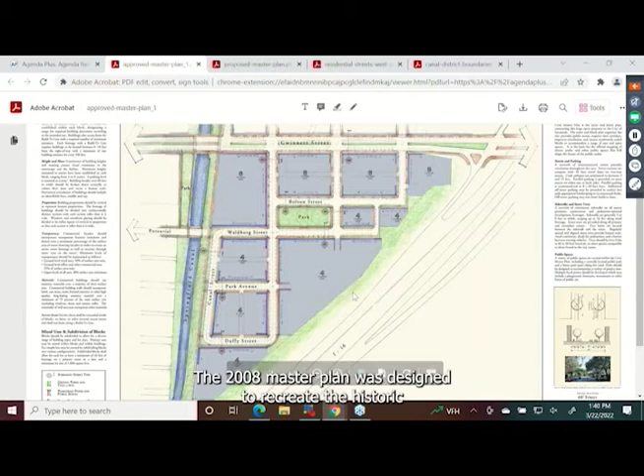There was a master plan approved in 2008, and this is a copy of that plan. The 2008 master plan was designed to recreate the historic development pattern and the open space network of the downtown historic district. This property, on the south side of Gwinnett Street, is right across the street from what is now the Enmarket Arena site, the City of Savannah's new arena.

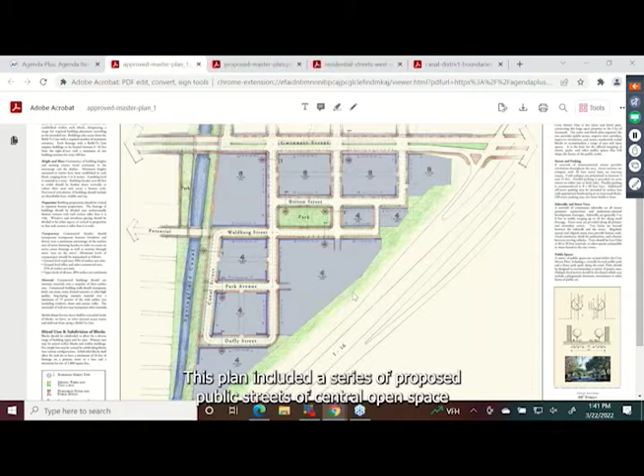This plan included a series of proposed public streets, central open space, and planned intersecting vehicular connections across Gwinnett located here. There were 4 access points proposed across Gwinnett Street into the arena site, and a potential access across the canal to Stiles Avenue to the west, located right here.

These connections today will not be possible based on the design of the Gwinnett Street improvements, which are currently under construction and slated to be completed this summer. But at the time this plan was developed, the final design of the Gwinnett Street improvements were unknown, and therefore some assumptions had to be made about connectivity.

I'll show you in the next plan the proposed connections for the site as the current applicant is requesting. In addition to this plan, there were development guidelines associated with it that include height and mass for buildings. It recommended buildings between 4 stories and 8 stories in height. Each of the areas in blue here are the developable areas.

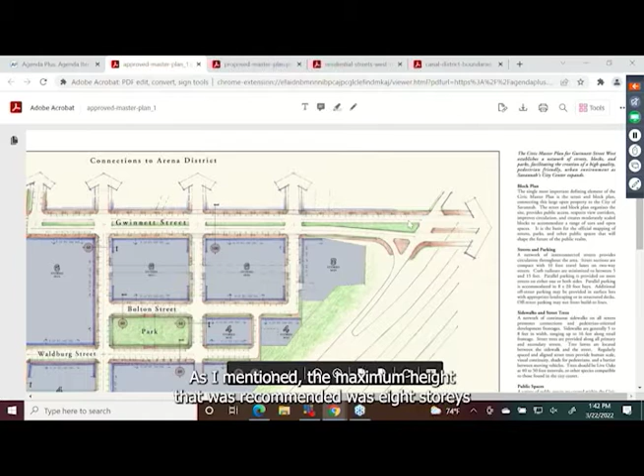As I zoom in a little, you can see the proposed build-to lines that were recommended for the various blocks to be street fronting buildings in those areas. The maximum height recommended was 8 stories, and all the heights on this project were proposed to be defined by stories, not by feet.

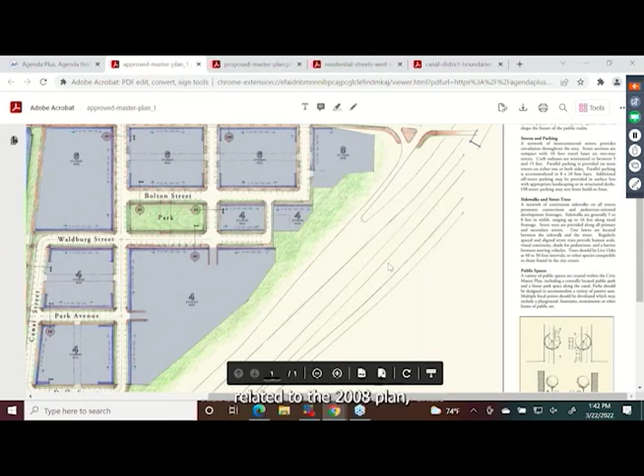The principal concern that came out later related to the 2008 plan, which we're looking at here, were stormwater issues that came to awareness later in the process. As you can see, and as I noted, this property is still undeveloped. This is the subject property located here, and outside of a cell tower located on the property, it's completely vacant.

The city is aware of a stormwater issue in this area. The Springfield Canal runs along the west side of the property here. There is a proposal for improvements in this canal to address these stormwater issues, but until that is done, any development of the subject property will need to address some of the stormwater concerns. This property is immediately east of a few streets that I want to point out here for later discussion.

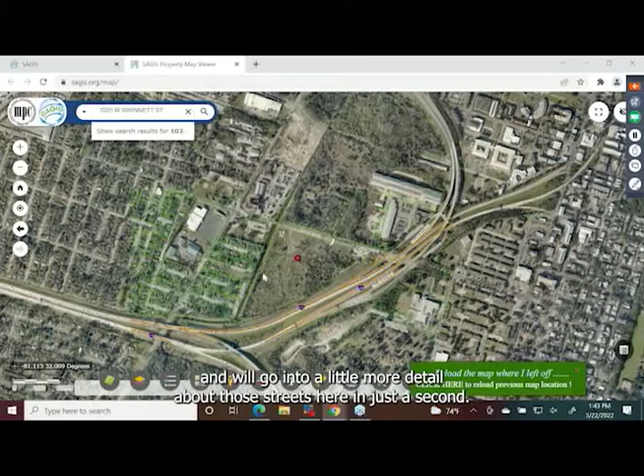Springfield Street, Felder Street, Darwin Street, and Hearn Street. This is a residential area adjacent to the subject property, and we'll go into a little more detail about those streets here in just a second.

The site you see here in the northeast corner is a proposed multifamily development. They would, however, with this master plan, leave the remainder of the property undeveloped, and that would serve as stormwater detention, both for this site and the greater area in general.

I did want to show you also that on this plan, the applicant is proposing additional right-of-way for the city for the widening of the canal. The belief is that once those improvements take place, then this property becomes developable based on those improvements.

But the interim development would require that this area be maintained for the purpose of controlling stormwater. The 2-phase approach of the current plan is to develop approximately 50% in that section, and for that remainder, as I mentioned, to remain open.

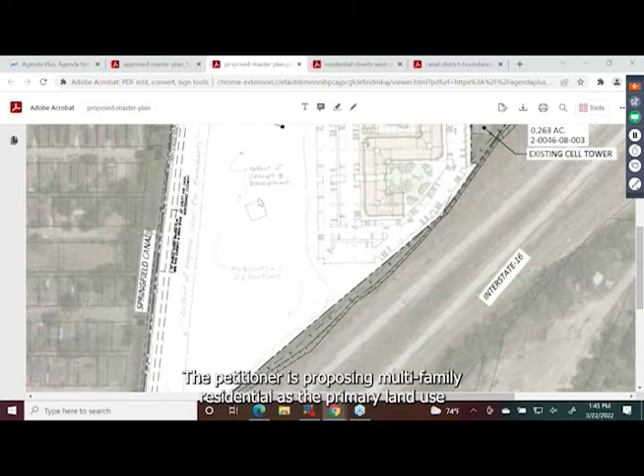The petitioner is proposing multifamily residential as the primary land use. The northernmost building will be developed to potentially accommodate a non-residential use as well. There are internal amenities and outdoor space provided with this development, and phase 2 is proposed to be future development available upon completion of that canal.

That future development would require that if this master plan is approved, it be brought back to the Planning Commission as an amended master plan at that time.

The subject site, as I mentioned, has frontage on Gwinnett Street. West Gwinnett is in the process, as I mentioned, of being improved, and it will include a 4-lane divided east-west travelway, new sidewalks and bike lanes, and a bridge over the Springfield Canal.

Portions of the subject property were dedicated to accommodate the new right-of-way and the pedestrian mobility features. The city plans for the West Gwinnett improvements to be substantially complete in the summer of 2022, and public transportation will be available along Gwinnett Street.

Per section 5.1010 of the zoning ordinance, the applicant will be required to provide a bus shelter with approval of the Chatham Area Transit when a development plan is submitted.

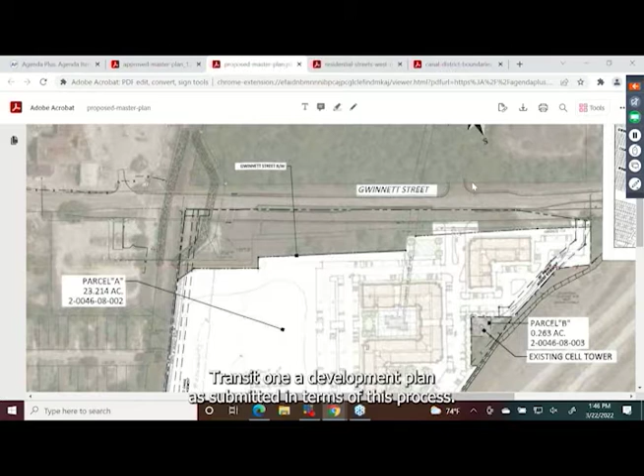In terms of this process, if this amended development plan is approved, at the time the applicant is prepared to construct something, they will have to submit a general development plan, a specific development plan to the city of Savannah for review prior to construction.

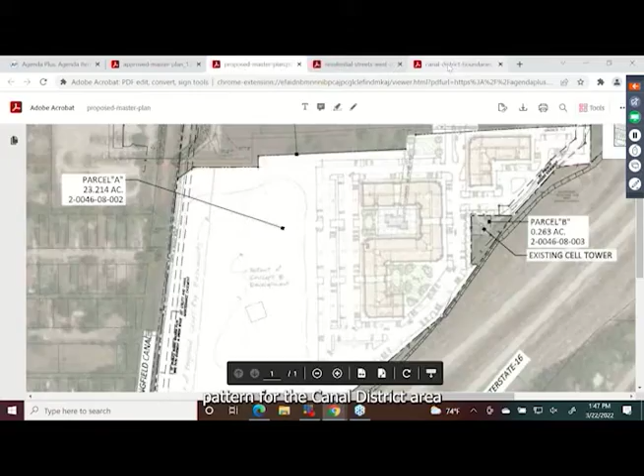The proposed land use change is consistent with the planned development pattern for the Canal District area. These are the boundaries of the Canal District as identified by the city of Savannah. The subject property is highlighted here.

The Canal District is proposed to be a mixed-use area designed to support the area around the Arena, which is located roughly in this location, with residential density, commercial and hospitality uses as well.

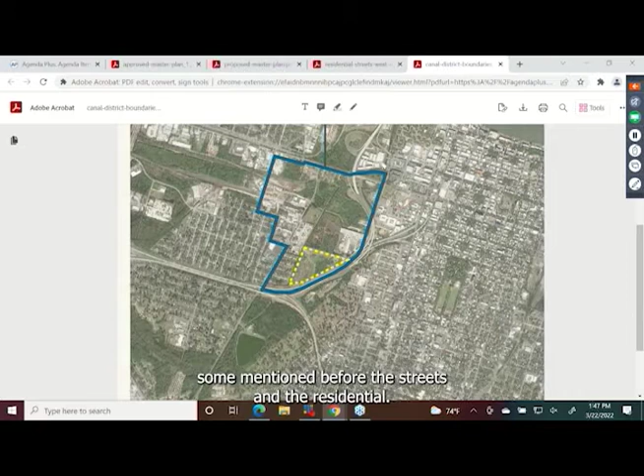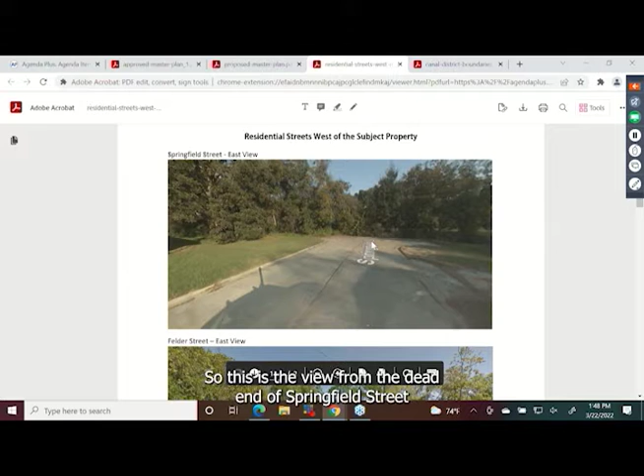I wanted to go back to show you a few photographs, as I mentioned before, of the streets and the residential that's immediately west of the subject property. This is Springfield Street, the view toward -- and all these streets dead end at the canal. That's the point I wanted to make. So this is the view from the dead end of Springfield Street across the canal toward the subject property.

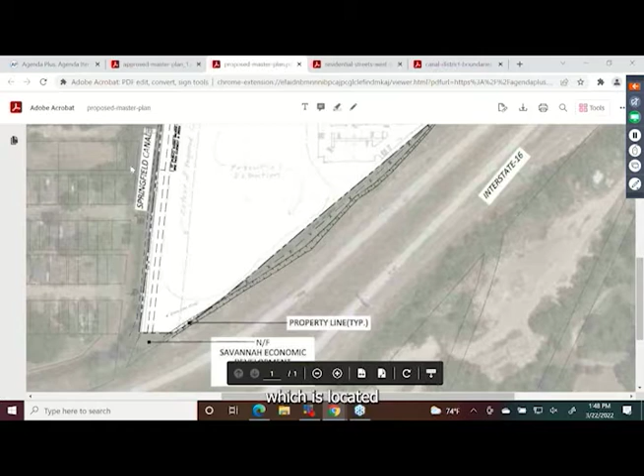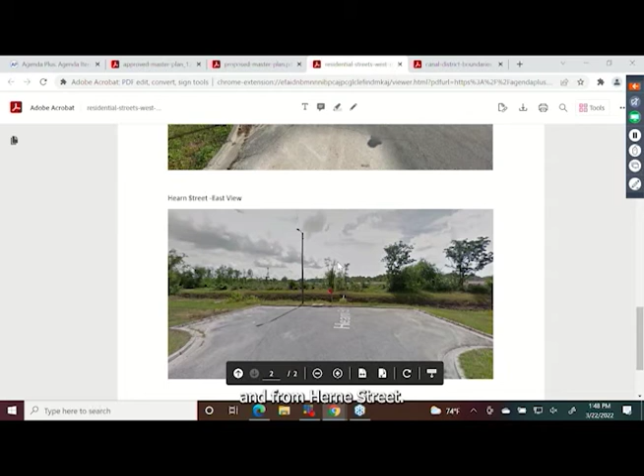This is the view from Felder Street, which is located approximately here. This is the view from Darwin Street and from Hearn Street. All these are looking east toward the subject property. And you can see, I believe in this view, the cell tower in the distance there.

We believe that the location of the subject property is conducive to supporting residential density. It does not immediately abut another use and will be accessed from a new 4-lane roadway. Phase 1 development is approximately 600 feet away from the nearest residential dwelling to the west across the Springfield Canal.

Planning efforts in the vicinity of the subject property have prioritized densification, pedestrian connectivity, and a mix of uses. The proposed amendment appears to align with these goals and the larger goals of the Canal District, and we believe that the master plan could potentially catalyze additional development in the area.

The opening of the arena and the further development of the Canal District master plan have provided a foundation for future development, and it's clear from staff's opinion that, based on the stormwater improvements needed in the vicinity, the existing plan is less feasible than the proposed plan.

So based on all those findings, we're recommending approval of the amended master plan. We are recommending a series of conditions, and I'll bring those up for you.

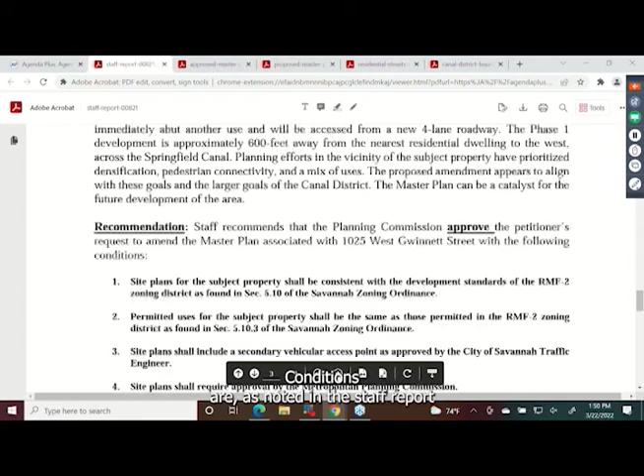Conditions are, as noted in the staff report, staff is recommending approval with conditions that the site plan for the subject property be consistent with the development standards of the RMF2 zoning district, that the permitted uses for the subject property be the same as those permitted in the RMF2 zoning district, that the site plan shall include a secondary vehicular access point as approved by the City of Savannah traffic engineer, and that any site plan for the property be approved by the Metropolitan Planning Commission.

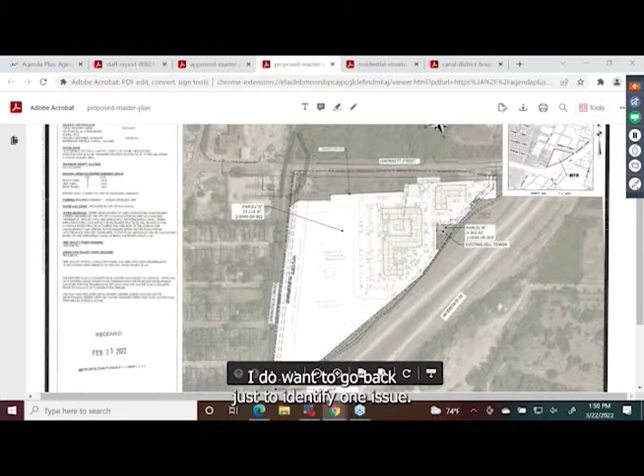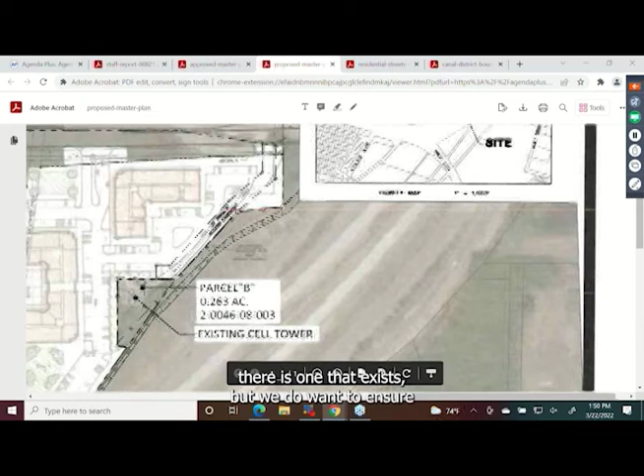I do want to go back and identify one issue. We've mentioned the secondary access. There is an existing access point to the property that's used as a maintenance road to the cell tower, which is located here. Our intention in recommending a secondary access—there is one that exists—but we do want to ensure through the review process that the City of Savannah is satisfied with that access point as an emergency access for the multifamily portion of this development in terms of the surface materials that are there.

But with that, I'll open it up to any questions. The petitioner's representative is here, as well as the engineer on the project, who can answer any technical questions.

I'm going to ask the petitioner to come forward. Yes, sir, and we'll ask you both questions if need be. Good afternoon, Mr. Yellen. Good afternoon, Mr. Chairman. For the record, Josh Yellen, on behalf of the developer, Spandrel Development.

We have with us both the developer and the project engineer, as Mr. Lotson mentioned, and they are also here to answer any and all questions that y'all have. We did want to thank staff for their recommendation of approval for this master plan amendment.

We think this master plan amendment has been a long time coming. This site was rezoned with the approved master plan that you saw in 2008. Prior to that, it was zoned business commercial for big box retail. Prior to that, it was approved for, I believe, 4 or 5 SCAD dormitories with a SCAD health facility. Obviously, as you can see, 15, 20 years later, this property remains vacant and undeveloped, in part because of some serious site conditions and, for lack of a better word, serious warts that this property has. There's a stormwater issue, there's a Springfield Canal issue, and there's also some environmental issues plaguing the site.

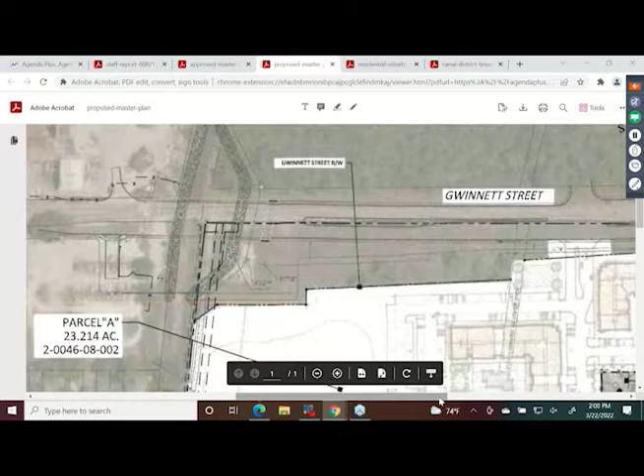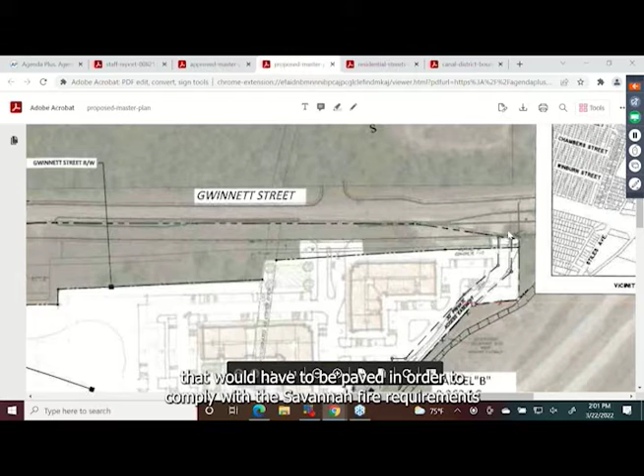So we reached out to the city of Savannah, and we were able to get the current Gwinnett Street widening plan. So the actual line work that you see here for Gwinnett Street is currently what's under construction. So we were able to line up our main entrance with where the full access median break is being provided by the city. And then we would have our secondary access basically as far over on the east as possible. That would have to be paved in order to comply with City of Savannah fire requirements.

And there was discussion about nearby residents? I didn't see any, and I think you answered that question when you came up. So had there been any opposition? Was there anything that needs to be addressed regarding notification to anybody nearby? No, ma'am. All parties were notified in compliance with state law, and we have not received any opposition to date.

Thank you, Ms. Bowles. To that point, could you please, just for the record, state what those methods were as far as the notification for the community? So the notification is provided by the MPC.

Mr. Stevens and members of the board, consistent with the notification procedures of the zoning ordinance, we send individual letters to all property owners within 300 feet of the subject property. We did that. We did not have any responses, either support or opposition for this particular case, which is sometimes the case with master plans. We do see much more interest in participation when it comes to zoning petitions, but since this is not a zoning change, but an amendment to a master plan, that's probably part of the reason as well.

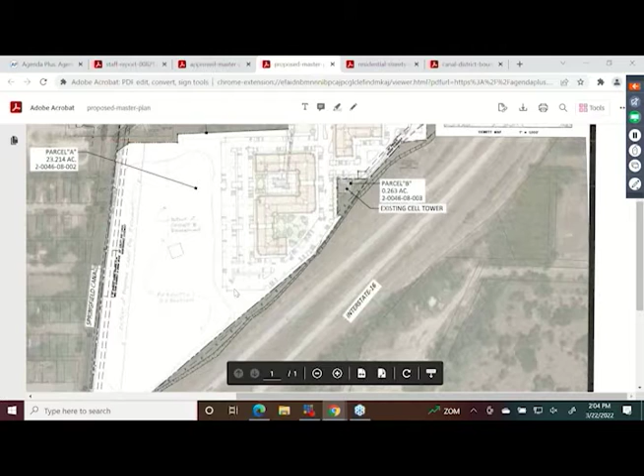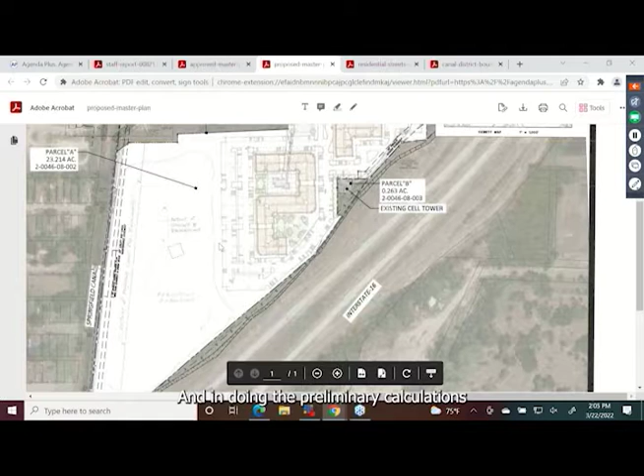Now, keep in mind that it's separate from the stormwater. So for any of the normal stormwater events that we have, the pond volume that is being provided is well above any of the requirements that are needed. So in addition to providing the floodplain mitigation, we are able to meet our pre versus post runoff far and above. And doing the preliminary calculations we have based on this current plan, there is excess capacity here. There will be ability for backflow. Just wanted to ask about the drainage.

So in lay terms, in the event that anybody in attendance at the facility or on the call is from the community, the current pond and the capacity it can hold should be able to aid instead of presenting a further stormwater issue, correct?

That's correct. There should be no additional impacts to the surrounding community based on this development. We're actually providing additional storage and hydraulic connectivity so the water can backflow back and forth in between. All right, thank you.

Mr. Melder? Thank you, Mr. Chairman. With the requested 5th story, what would be the proposed height? We were discussing before, 65 feet, max 65. Max 65. Yes, sir. Okay, thank you.

Mr. Wildwood: This may be for staff and the developers. So the current site plan approves 8 stories in the smaller area, 6 stories, and then 4 stories. And you're requesting it to be zoned RMF2. Is it the RMF2 zoning that prevents it from going to 5? The RMF2 zoning has a maximum permitted height of 50 feet. It's not measured in stories, but it is measured in feet. So within that, a 5-story building, unless it has a flat roof, is not possible. So I think that's why the applicant is requesting the additional height.

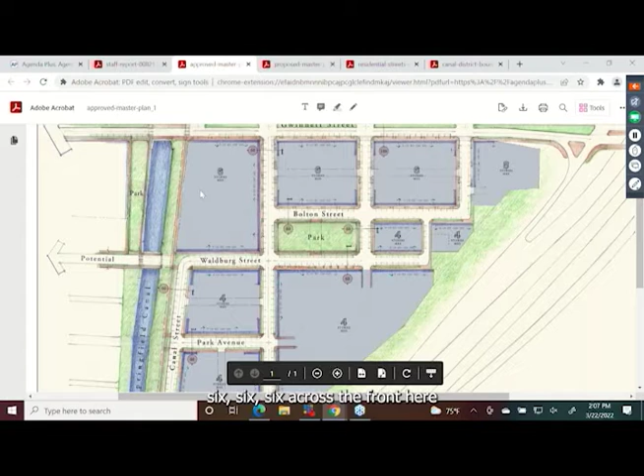Let me zoom in for those who... So the numbers you see here are the approved heights for what were proposed with these proposed blocks. So 8 stories to the far east, 6, 6, 6 across the front here, and then 4 stories as you go south.

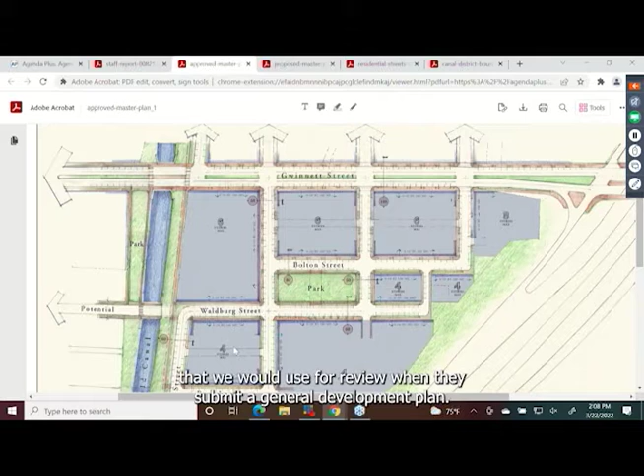When the petitioner submitted their master plan, they did not include the types of development standards that we would use for review when they submit a general development plan. That's why we recommended it be reviewed based on the multifamily zoning designation closest in the city of Savannah, which is RMF2. Within that district, the maximum height is 50 feet. We did not make a recommendation that additional height over what's permitted in the RMF2 district be allowed.

But we did understand the applicant was going to pursue that with the board today. So those development standards, as much as the height or more maybe than the height. Yes, we were just trying to put everything within the RMF2 bucket, so to speak, so that when it was time to review this, we would review it based on those standards. Mr. Melder: Mr. Watson, do you mind zooming in on the height and mass portion of the master plan? Sure.

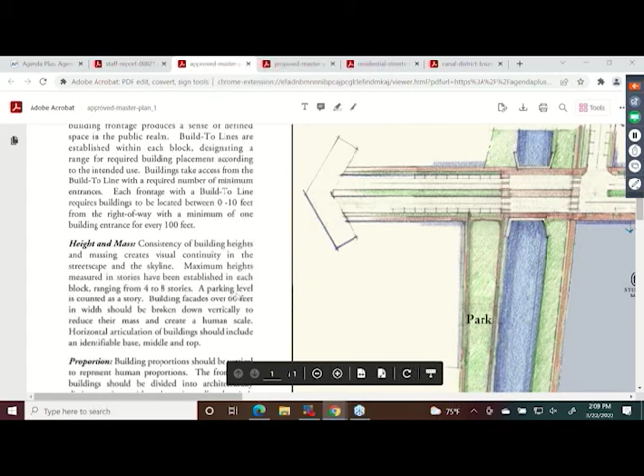Do we think that we could carry over some of this language specifically as it relates to the building facade being broken down vertically to reduce their mass and create a human scale into the conditions of this approval with the 5th floor? Well, I think the commission certainly has that within their purview to do that. Yes, sir. That will be my recommendation to my colleagues.

Mr. Melder, could you restate that, please, just for the record, so it's clear? That we carry over language here in the original master plan from 2008, from the height and mass section, that building facades over 60 feet in width should be broken down vertically to reduce their mass and create a human scale. Horizontal articulation of buildings should include an identifiable base, middle, and top. Gotcha. Thanks.

Any further questions? Anybody on the computer? That's the commissioner. Have any questions for staff?

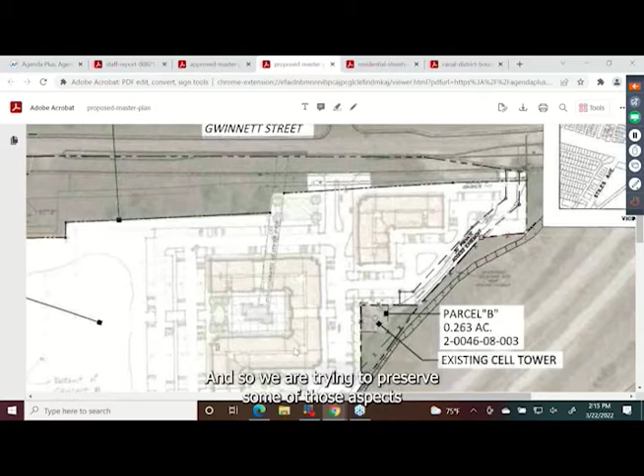And yes, ma'am, Ms. Epstein. We tried to carry over as much as possible from that plan, understanding that the grid pattern with the public dedication of streets and the connectivity is not feasible. But we tried to preserve the aspects that would actually fit in with making a feasible development. As you can see at the top, we have included a few pocket parks across the development. This pocket park at the front, I'll try and highlight it over here. We have had conversations with the city of Savannah as well, knowing that the Canal District is trying to have a more art-friendly feel than the rest of the city. We've had conversations with the city already about putting some public art installations in that park. We also intend to line the entryway with live oaks. We are trying to preserve some of those aspects that we see in the downtown area, but understanding that this site is severely limited by what we can do.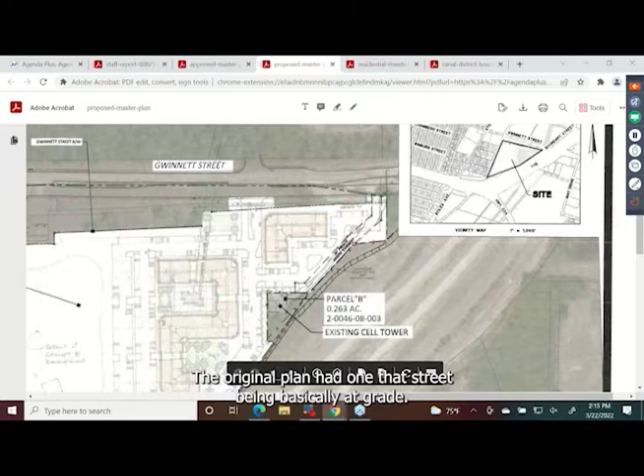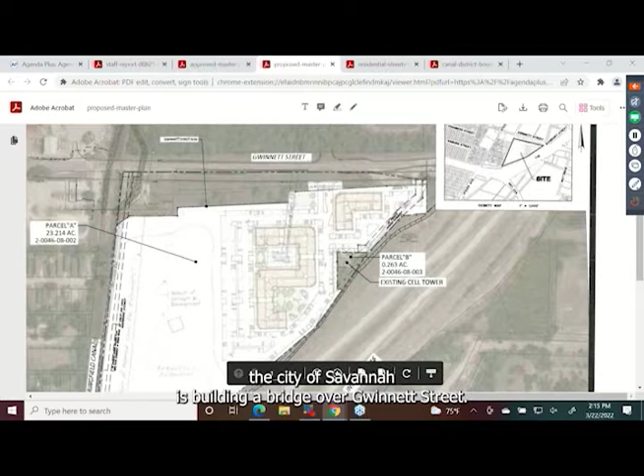Is there any opportunity in that right of way in the short term? But I will let John. I just wanted to add one other thing. Something else to keep in mind when looking at this: the original plan had Gwinnett Street basically at grade. If you look back at the approved master plan, there was a box culvert coming through here, and currently the city of Savannah is building a bridge over Gwinnett Street. So when you see this large right-of-way acquisition across the front, that was basically for tie slopes. This area is all 3-to-1 side slopes, very steep tying down. The city of Savannah also has a maintenance access road that runs through this area. All of that was kind of taken into consideration when laying out this revised master plan. If we were to push the buildings up, they would be backed right up next to a slope coming down off a tie slope, and there was going to be a maintenance road right there. So we felt like this was a good plan to offset the building and give a little bit of room between ground story units and the hill.

You know, when looking at the city's plan for Gwinnett Street, with the grade change coming up over Gwinnett Street, that's what eventually made all these connection points coming across infeasible. It just wasn't possible with the grades.

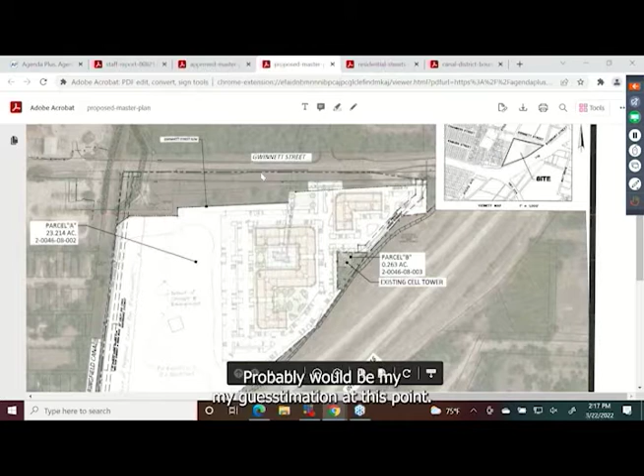So what would, if you're driving west on Gwinnett Street, what would you see of this development if it were laid out the way it was? As you're coming up, you'll be looking over, like level with the second story or something, probably would be my guesstimation at this point. I don't have the grades on Gwinnett Street, nor do we have that.

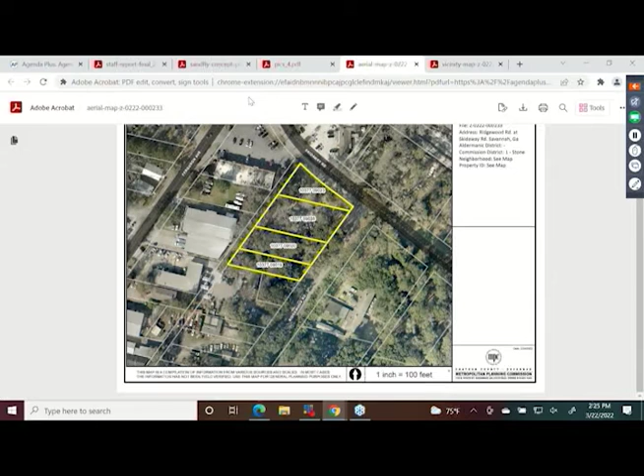So the BN zoning is for neighborhood business. From the ordinance, the purpose of this district shall be to provide convenient shopping facilities consisting of convenience goods and personal services in neighborhood market areas. So we see this as a good fit for that.

There's a good amount of commercial around here, just up the road on Skidaway, at that center right there. So this is sort of the transitional point from where Skidaway starts to turn from commercial to residential. We feel it still fits with the pattern of development for it to be moved over to neighborhood business.

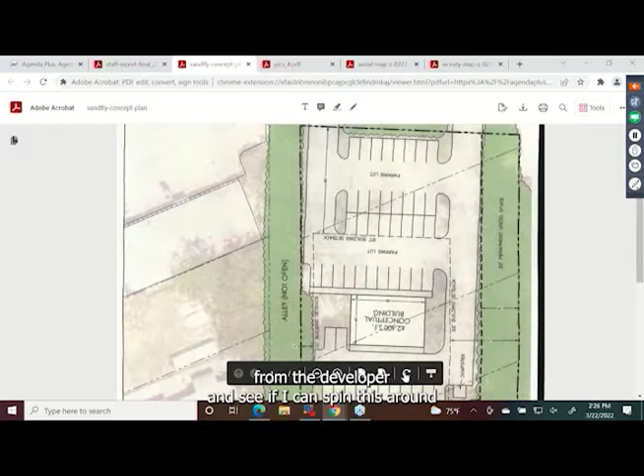As I said, we did get a concept map from the developer. Let me see if I can spin this around. This is of course not binding, just an idea for the concept. This would be Skidaway Road down here at the bottom, and this would be Ridgewood over here.

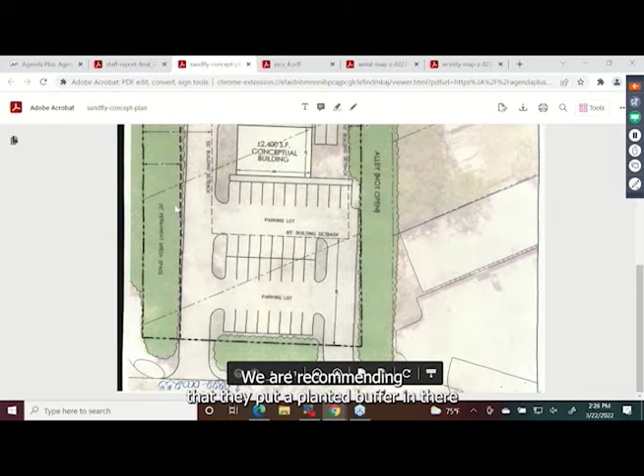We're recommending a 30-foot buffer along the south and east sides. I'd like to make clear that right now there's not really any trees here, just kind of green space. We are recommending that they put a planted buffer in there to create actual screening against the residential properties.

So where's my staff report?

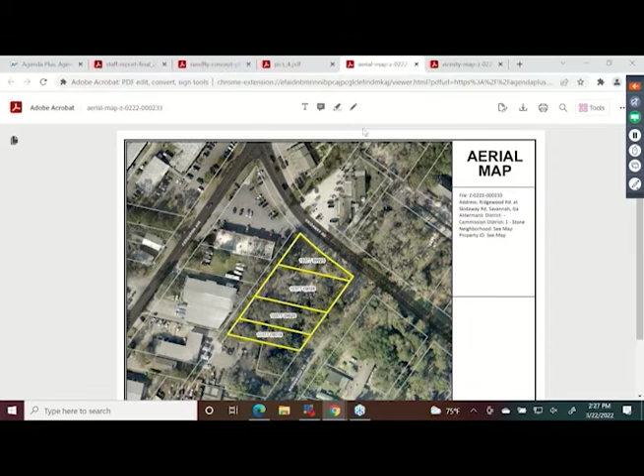So just to sum that up, Skidaway Road is a pretty heavily trafficked commercial corridor that begins to transition to residential just east of the subject property. It's been used as overflow parking by nearby restaurants for years and would likely continue to be used that way, just with proper paving, parking, and access. We also want to recommend that the access points, as described in the concept plan, only lead out onto Skidaway Road rather than onto Ridgewood, because that's a pretty small, residential kind of road. It's not something commercial traffic should be coming in and out on.

So the proposed zoning would allow neighborhood scale retail and services which are similar in nature to the existing commercial uses in the vicinity. This, in addition to the fact that residential development is unlikely at this location, lends justification to the requested rezoning.

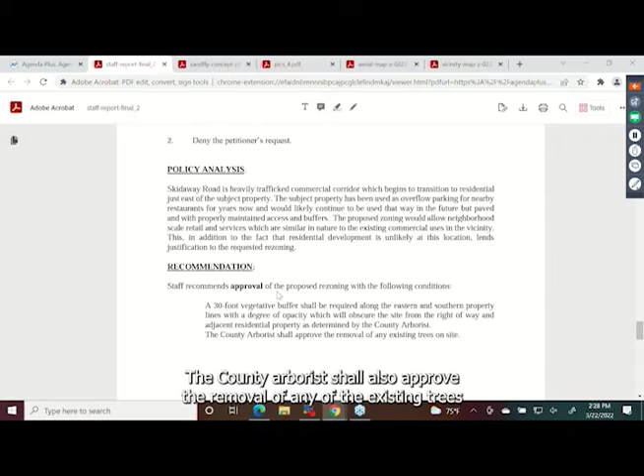So we are recommending approval, but with the following two conditions. First, that a 30-foot vegetative buffer be placed on the southern and eastern property lines with a degree of opacity which will obscure the site from the right-of-way and adjacent residential property, as determined by the county arborist. The county arborist shall also approve the removal of any existing trees on site, which includes the two large oak trees I showed you earlier. But I'm happy to answer any questions.

Any questions from commissioners here? How about on the computer? Is the petitioner here? Yes, sir. You want to come forward?

Good afternoon, I'm Rob Brannon, an attorney with Bouhan Falligant, and I represent Sheffield and Shore. I'm here just to answer any questions you have. We think this will be a big improvement on what's been there - it's been a parking lot for about 25 years. There will eventually be a building, possibly, in that space.

Any commissioner on the computer? Is there anybody in the audience who wishes to come speak, ask a question? How about on the computer? Please raise your hand feature on the computer if you have a question for the petitioner or staff.

Mr. Chairman, Jessica Perry. Ms. Perry, please state your name for the record, and you have 3 minutes. Hello, this is Jessica Perry, I am the county arborist for Chatham County. I did notice that my name was on their proposal, and I wanted to make a statement that whenever I do review the plan, I would like to have those two trees that were pictured saved. So that will be my recommendation when I do review the plan.

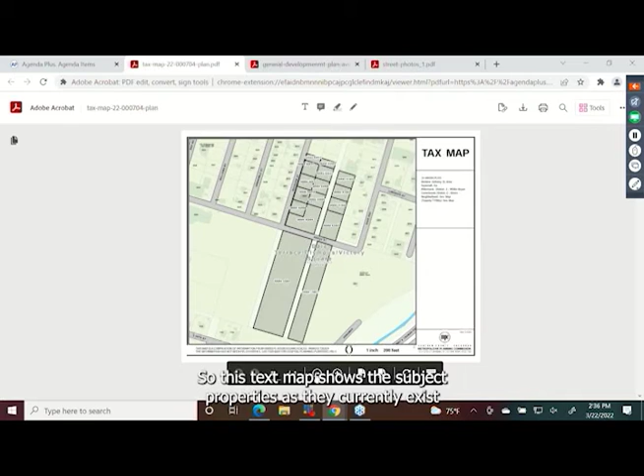So what we have here is a general development plan submitted by the applicant, Aventon Companies. The petitioner is bringing this forward as a result of a condition associated with the rezoning done in December 2021. The city of Savannah rezoned this property from community business and single family residential to multifamily residential. As a condition of approval, they require that the development plan be brought back to the Metropolitan Planning Commission. This tax map shows the subject properties as they currently exist. Under development, these properties will have to be combined into a single property, or two properties in this case: the north side of Carey Street and the south side of Carey Street.

Among the other conditions associated with the adoption of the rezoning included eliminating vehicular or pedestrian access to Dixie Avenue. Also included the provision of a 10-foot multi-use path on the south side of Carey Street, a vegetative buffer and privacy fence between the site and residential properties on Dixie Avenue, as well as pedestrian connectivity out to Bee Road, which is just west of the subject property here.

Staff did review the submitted general development plan. Section 3.8.4 of the zoning ordinance outlines the review procedures for GDPs. General development plans are intended to, quoting the ordinance, identify the overall concept of a proposed development. Information required on such a plan is intended to convey the character and layout of the project and to identify issues that must be addressed in the specific development plan phase. It then lists the requirements for general development plans, which is essentially a checklist.

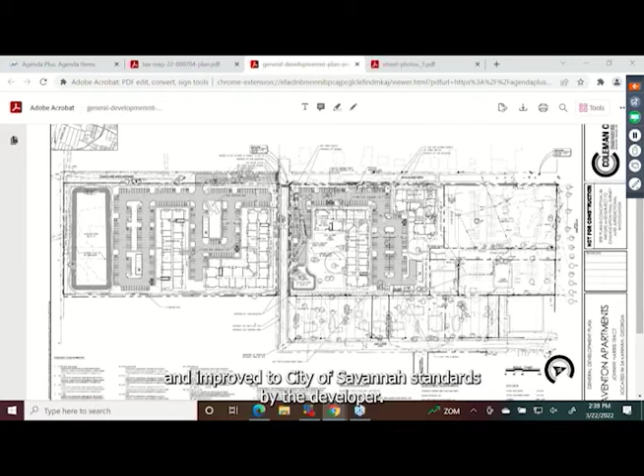The northern portion of the site is accessed via Wicklow Street. Wicklow Street is an improved City of Savannah street with a 40-foot right-of-way. The southern portion of the site will be accessed via Johnson Street. Johnson Street is currently an unopened right-of-way, but it is proposed to be opened and improved to City of Savannah standards by the developer. The location of these access points were determined in consultation with the City of Savannah traffic engineer.

Based on staff's review, the proposed general development plan does meet the requirements of the zoning ordinance. The proposed plan also meets the additional requirements that were conditions of the 2021 rezoning adoption by the mayor and aldermen. Based on the plan provided and consideration of the review process, staff is recommending approval. We did add one condition, a note really, that specific development plan approval will be contingent on conformance with all the standards required in that section, as well as the abandonment and or quit claim of the Munster Street right-of-way, which bisects the subject property. Based on the general development plan, that would have to be addressed prior to any construction on site.

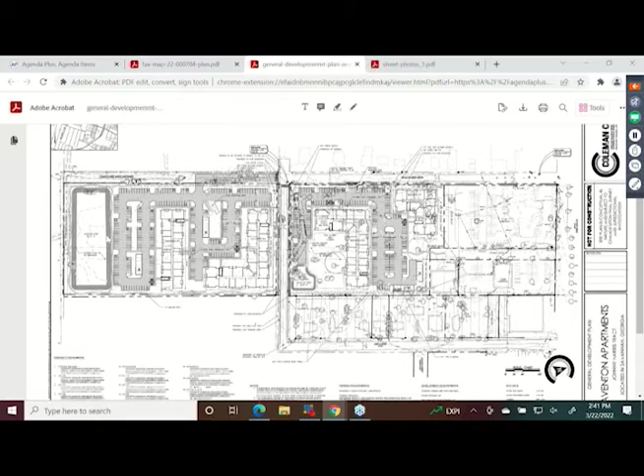Good afternoon. Travis Burke with Coleman Company, representing the petitioner. Marcus did a great job outlining the project. Really don't have a whole lot to add to that other than, there were 5 conditions placed on this by council, which we've addressed. One of them being presenting to the planning commission, which brought us here today.

We've removed any access that we were currently showing from the project to Dixie Avenue. We are providing the 10-foot wide multi-use path on the south side of Cary. This path will connect to the Police Memorial Trail and provide that connection back to Bee Road and to Daffin Park, providing a crucial link for that community resource. We're providing the vegetated buffer and fencing for the properties adjacent to us along Dixie Avenue. For pedestrian connectivity to Bee Road, we're currently working with the Salvation Army on securing the necessary easements in order to construct that access.

Cary Road, our street, is only a 32.5-foot right-of-way, which is kind of odd, so there's not a lot of public right-of-way space there to fit in this proposed sidewalk. So we've met with Salvation Army a couple of times. They're excited about being able to be a part of this. They see it as a benefit to the community, and also as an opportunity to bring community to their center. They've just recently renovated their gymnasium floor and are planning outside recreation and activities that they're hoping this will help bring the community together. We've gotten great reception from them, and we're just working through the details of how that would be implemented and to get that easement secured.